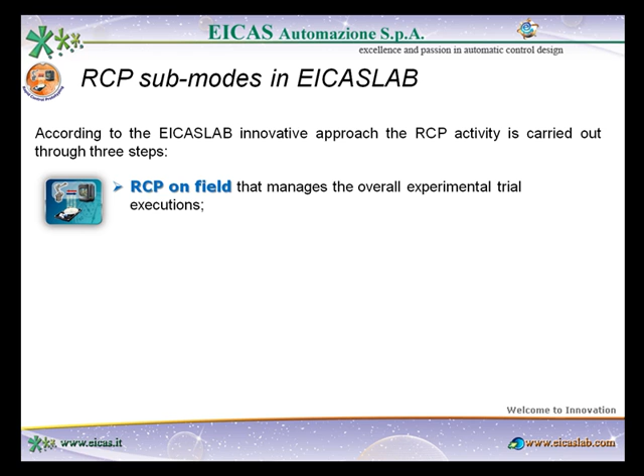In EICASLAB, the rapid control prototyping activity is carried out through three sub-modes. The RCP on field that manages the overall experimental trial executions, the slow motion that allows, by means of the slow motion tool, the offline repetition of experimental trials executed on field for advanced debugging and tuning purposes, and the

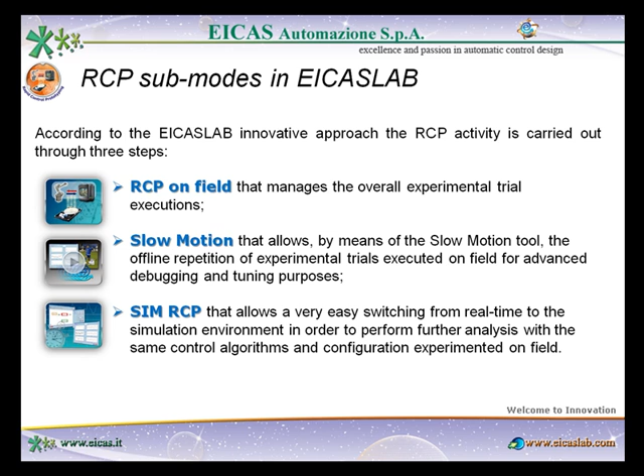SIM RCP that allows a very easy switching from real-time to the simulation environment in order to perform further analysis with the same control algorithm and configuration experimented on field. We first illustrate the rapid control prototyping on field.

Starting from the control system architecture designed in EICASLAB and through a real-time scheduler and multi-threading and multi-core programming techniques, EICASLAB generates the real-time software code to be transferred on a PC platform with a Linux real-time operating system directly connectable to the plant to be controlled.

Such real-time software code is able to configure and manage interfaces of the PC platform, offering fully customizable libraries of built-in interfaces and protocols. It is able to configure the real-time scheduling of the overall control activities and to execute in real time the RCP trial, piloting the plant through a specific professional tool, the RCP Manager, including an easy

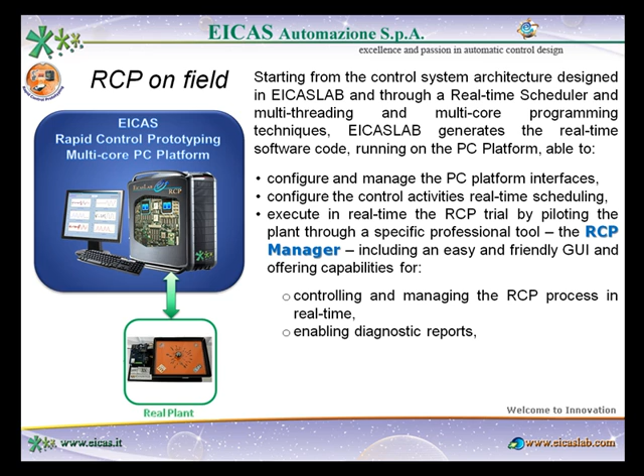and friendly graphical user interface and offering capabilities for controlling and managing the RCP process in real time, for enabling diagnostic reports with the aim to warn about possible faults or problems arising during the RCP trial execution, for visualizing on the screen the dynamic behavior of the variables of interest for real-time monitoring, for recording on the PC disk

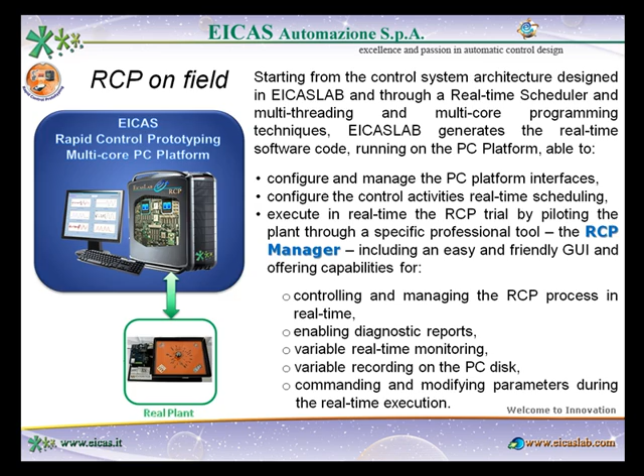all the variables of interest for a subsequent post-analysis through the POST tool, or for performing the offline repetition through the slow motion tool, and for commanding and modifying parameters during the real-time execution. We now illustrate the slow motion sub-mode.

During the experimental trial execution, it may be difficult to monitor in detail the variables of interest or to follow and understand the execution of the control algorithm because the access to the variables may be limited. In EICASLAB, this problem is faced by means of the slow motion tool.

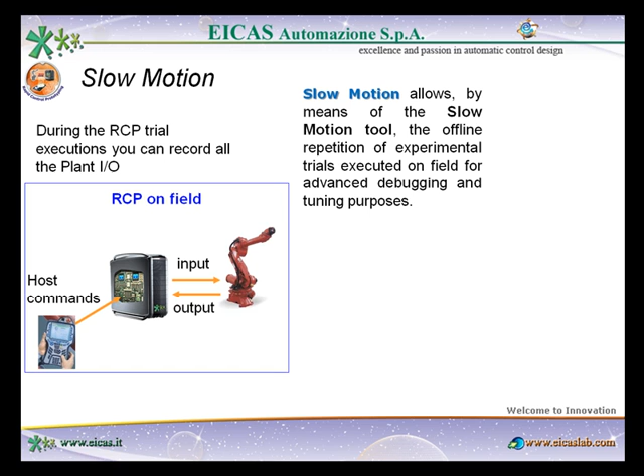During the execution of the first sub-mode, the rapid control prototyping on field, a slow motion recording function is available, able to automatically record on the PC disk all the plant inputs computed by the controller and the plant outputs and the host commands data sent to the controller. When you have concluded your experimental trials, you can run on the RCP platform the slow motion that, starting from the recorded data, works like a moviola.

The application software runs not in real time, but it is exactly the same one that ran during the experimental trials. The control functions receive as input the recorded outputs of the actual plant and the recorded host commands instead of the simulated ones. Then the recorded experimental trial performed by the actual plant controller is completely repeatable in EICASLAB

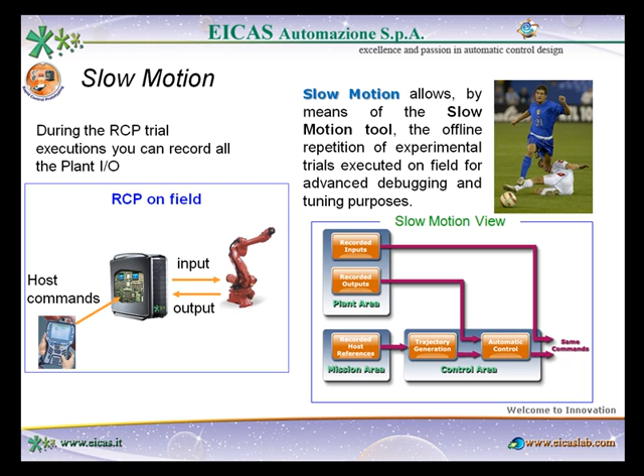using the same control code used on field, with the difference that now the process can be performed in slow motion and, if useful, may be run step by step by using a debugger program for advanced debugging and tuning purposes. All the working variables of the control software may be recorded and then analyzed by means of the POST tool available in EICASLAB.

We now illustrate the SIM RCP sub-mode. It can be useful after an experimental trial carried on with the RCP on field to come back in a simulation environment in order to perform further analysis with exactly the same control algorithm and the same control configuration experimented on field. Such configuration during the experimental trials can be slightly modified with respect to the one of the first operative mode.

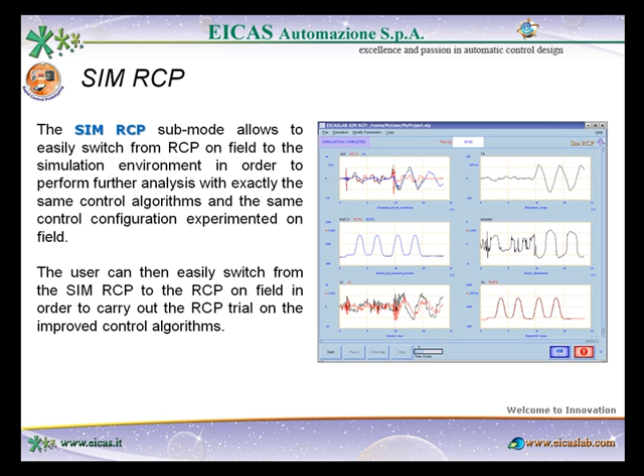The Sim RCP sub-mode allows to easily switch from RCP on field to the simulation environment, maintaining all the data that you have set during the experimental trial. You can then easily switch again from the Sim RCP to the RCP on field in order to carry out the RCP trial on the improved control algorithm.

We finally list the tools that help you performing the rapid control prototyping control design phase in the rapid control prototyping operative mode. First, the master tool allows to manage the EICASLAB projects and runs, for each operative mode, suitable and powerful software tools necessary to develop, test and validate the overall control algorithm.

The SimBuilder tool allows you to implement your control strategy, to schedule your control functions, to define the hardware input-output interfaces, and to configure all your trial executions. The RCP Manager tool allows you to interact with the real-time application and to follow the system variables trend during

the RCP trial's execution. And through the MPI CPO Manager tool, you can perform model parameter identification, specifically devoted to identify the parameters of the plant model of your control, and control parameter optimization, specifically devoted to optimize the control

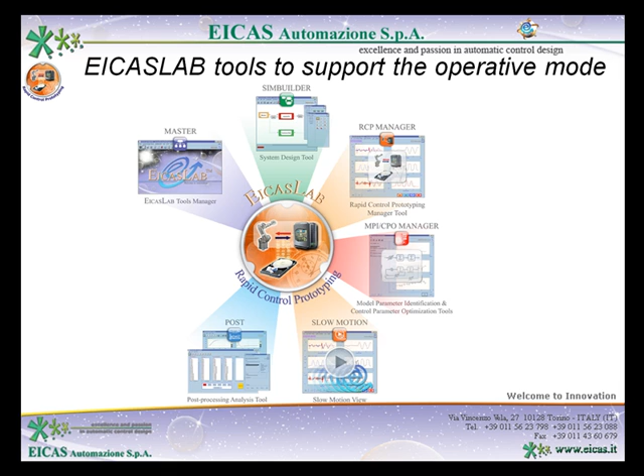algorithm parameters. The Slow Motion tool allows the repetition of experimental trials executed on field, and you can post-process any data obtained during the trial execution using the Post tool. Finally, the Sim RCP tool allows to perform like real-time simulations of the same control algorithm and configuration experimented on field.

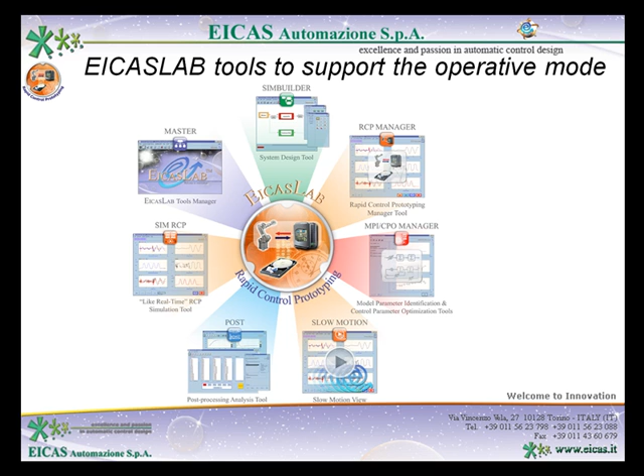This webinar stops here. The next webinar will deal with the rapid control prototyping operative mode exploited for the Amazing Ball use case. Thank you for your attention.